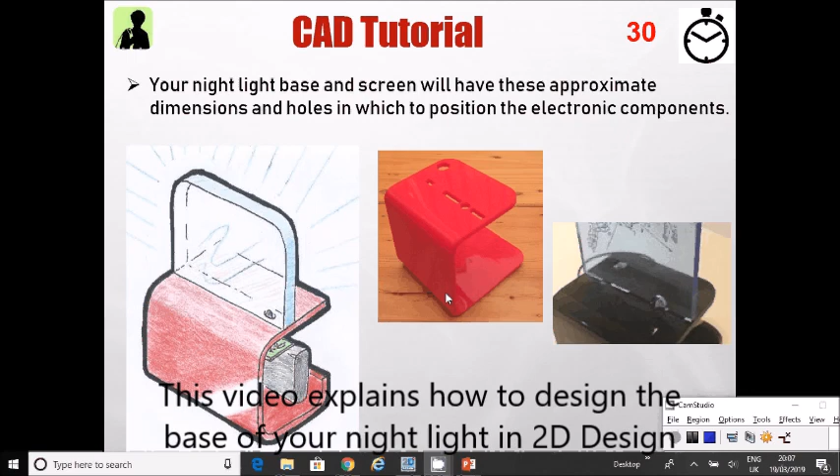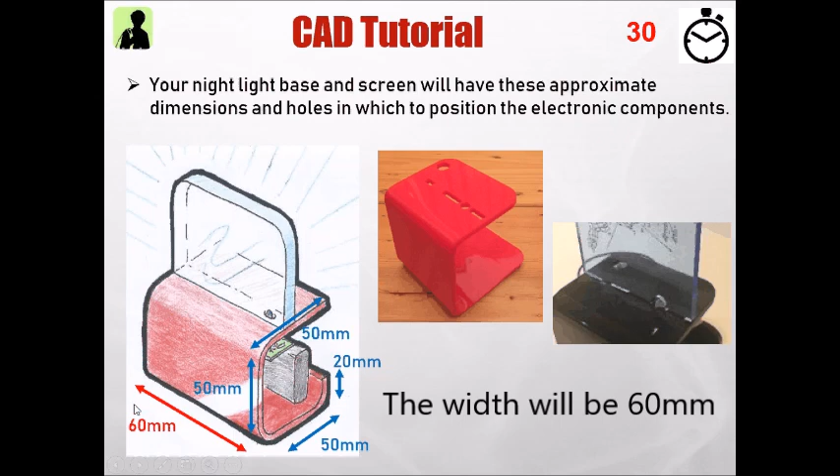Just a few things first. Remember, the size of your nightlight will be approximately like this. You'll have a base of about 50 millimeters, a front 50 millimeters, and a top 50 millimeters. Leaving at least 20 millimeters excess, you're looking at around 170 to 180 millimeters in total. The width will be 60 millimeters, and the top bit will be 50 to 70 millimeters. We also need to design space for the holes where the electronic components poke through and the screen slots in.

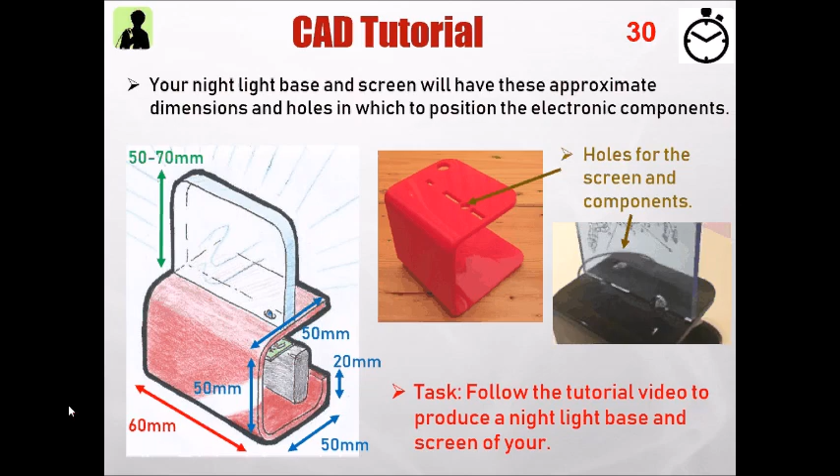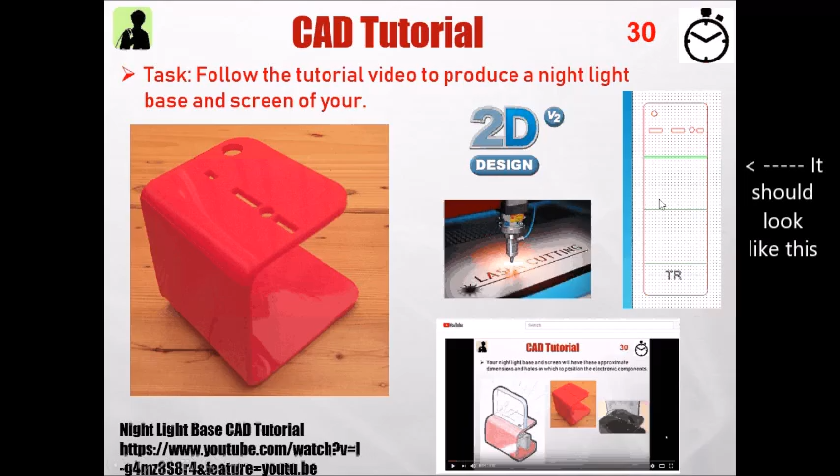So your task is to follow the tutorial, step by step as I do. You'll need to pause every now and again, and you should end up with an image something like this.

Okay, so once you've got 2D design open, it will look like this. First thing I would do is file and save in the location the teacher directs you to. As I said, pause every now and again, and do exactly what I do.

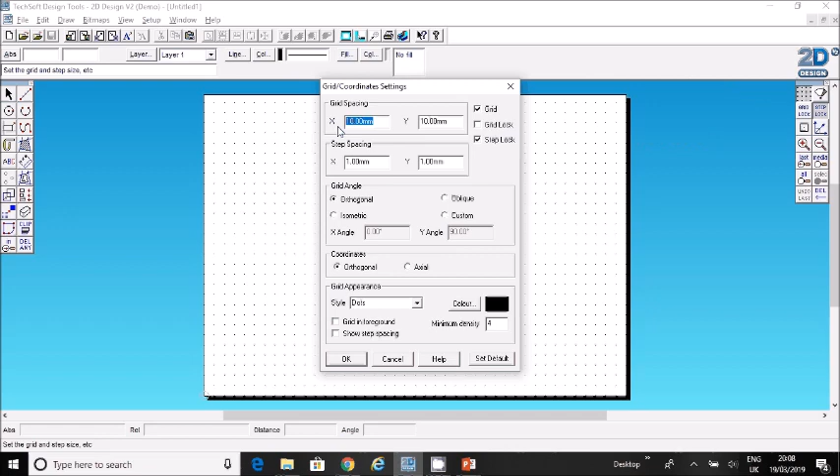The first thing I want you to do is change the grid spacing. Double click on the dots here, and change this to 3 millimeters and 3. Watch the dots - see, they're now closer together. There's a reason for that, and I'll show you later.

Then you're going to use this shaped option. If you click and hold, you get different shaped options, and we're just going to stick with the rectangle for now. If I just click, it will draw anywhere, but I don't want that - I need it to be on the dots, so I'll highlight and delete it.

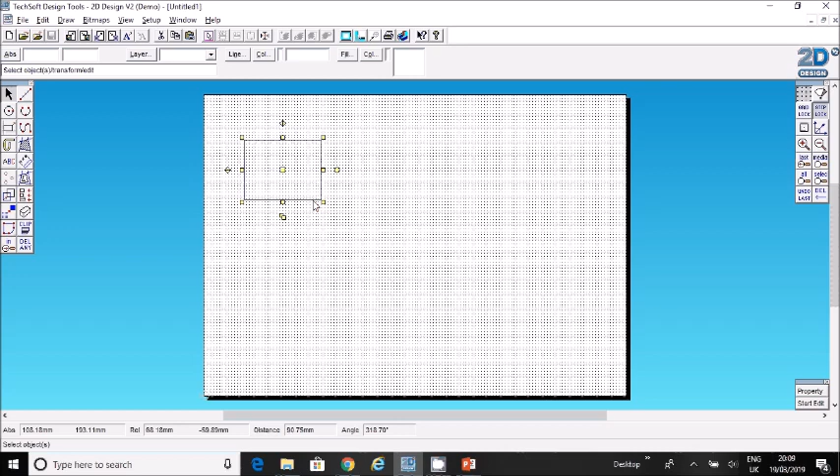Click on rectangle, this time keep grid lock on. Now it will stick to the dots, and that's accurate. I'm just going to delete that.

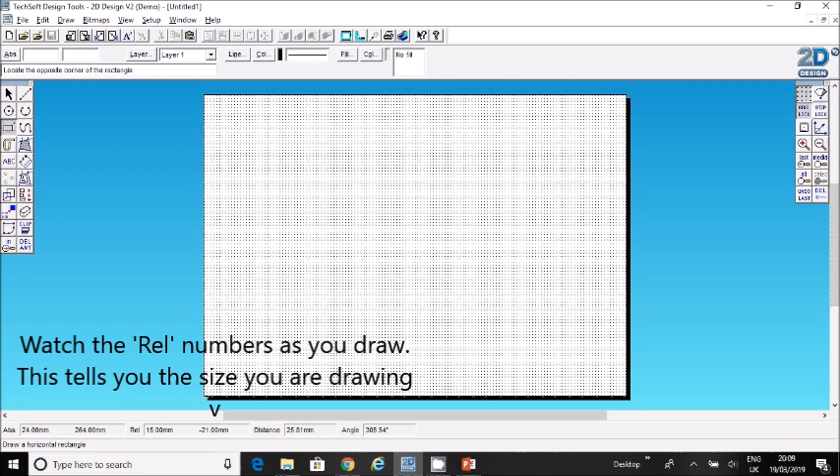You're going to look down here for the rel numbers. As I draw the box, watch for the rel numbers. I'm going to click here and drag it about 60 across, like so. At 60, if you look at the rel numbers at the bottom, and then I'm going to go down 180. Do exactly the same.

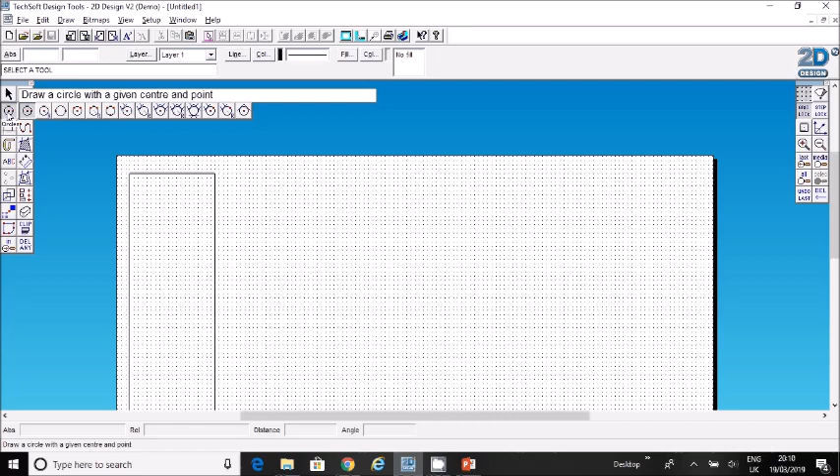I'm going to zoom in a little using this. Right, I want to round the corners. There's this little tool - if I click on line... where is it? Curve? It's this one, draw an arc. That's the second option down.

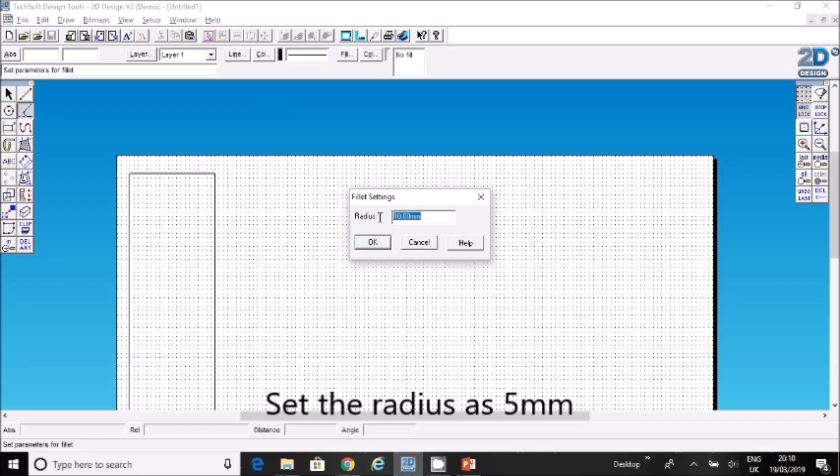I'm going across, clicking and holding to bring up these options. Go across to the end - draw a filleted arc between two lines. Set the radius as 5 millimeters, and then click on two lines, and it rounds the corner. Do that for each corner.

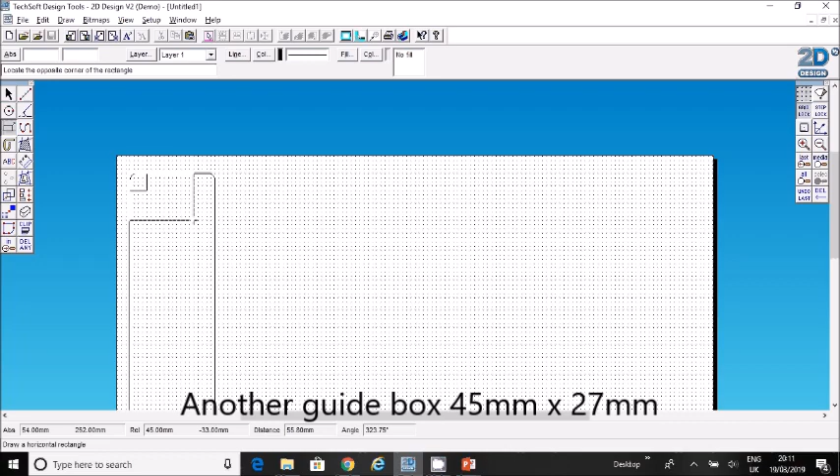Now we need to set the location of the holes for the electronic components. I'm going to use a box just as a guide. Click on this rectangle again, go to the top corner, and look at the rel numbers - one of the components needs to pop out about 12 millimeters by 12 millimeters from the corner. Click there. Then you need another guide box - this time go across 45 and down 27.

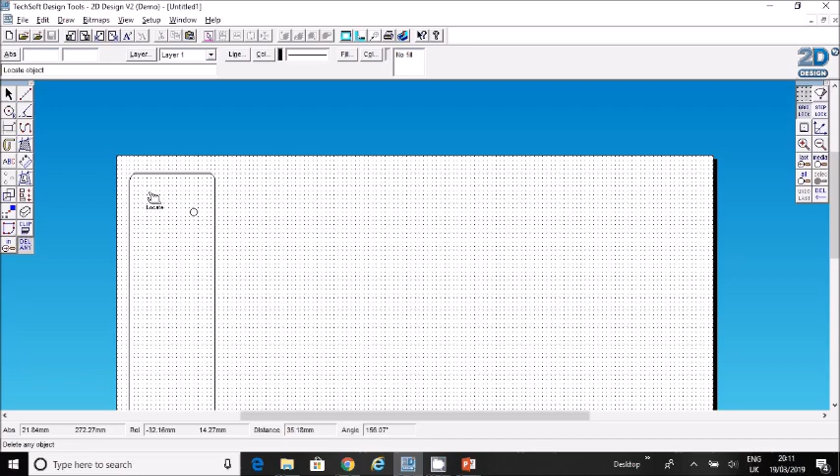Now you need a hole here. Click on circle, choose the second option, and set the radius to 2.5 millimeters. If you click there and there, you've set two circles where needed. At this point, delete the guide boxes - click on delete any. If you accidentally delete the wrong thing, go edit, undo straight away.

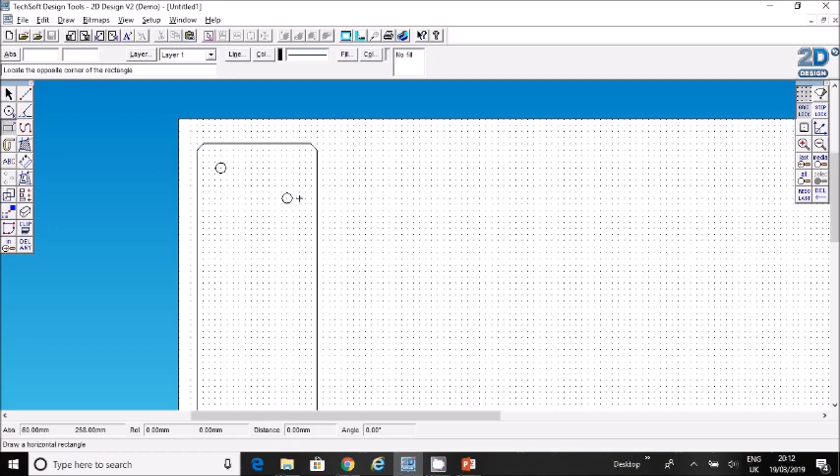The other holes you need are for the screen part, the top part of your nightlight that's going to poke through. Click on the shapes rectangle option, click 3 millimeters from the side of that circle, click and drag - that's 6 millimeters by 3. Then go 3 millimeters on this side, and this time do 12 by 3. Leave another 6 millimeter gap - you can count the dots as you do this. You'd end up with something looking like that.

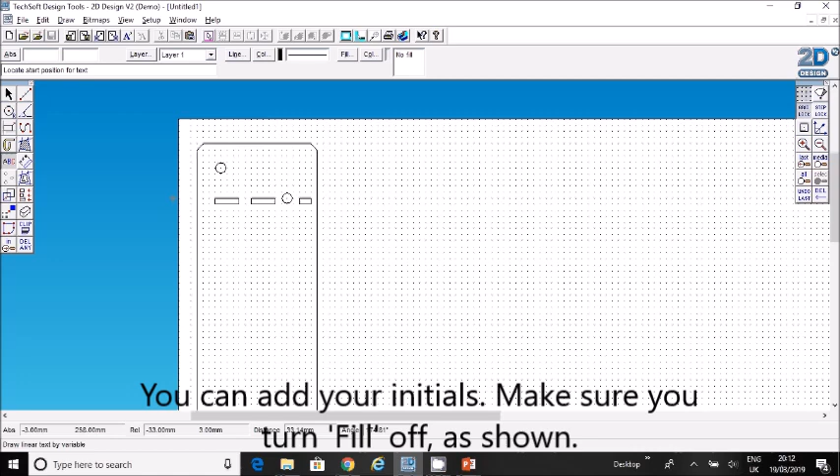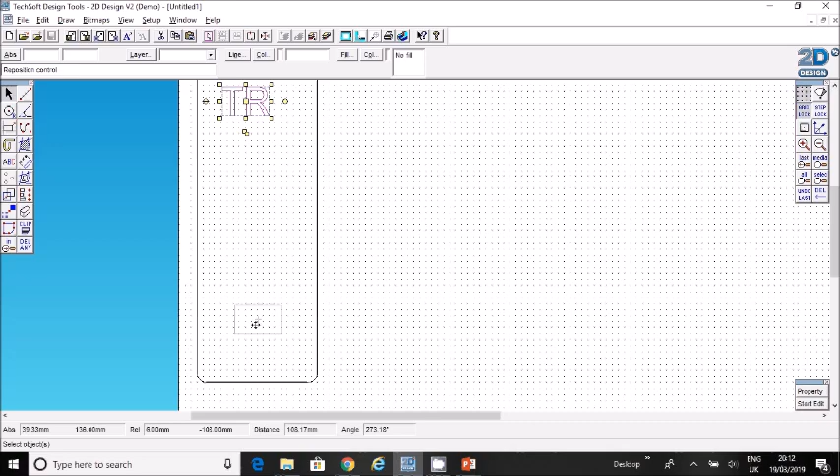Now I would add my initials. Click randomly on this ABC button, then click somewhere and write your initials. At the moment that's solid black - we don't want that, so click on fill here and select no fill. You can reduce the size of your initials if you want, click on the middle yellow dot, and you can change the location. Just leave your initials at the bottom.

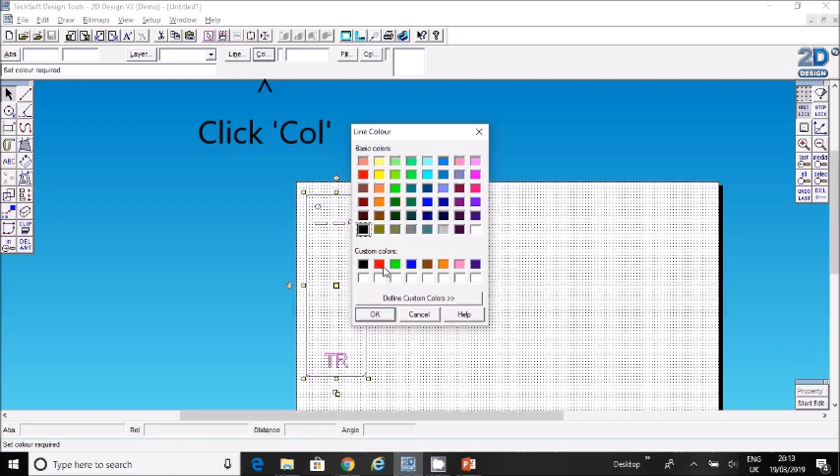The final thing to do before it's ready for laser cutting is change the color. Black will only engrave lightly on the laser cutter, so select everything, click and drag, then change the line color to red. Everything's now red, and we just need to change the writing, the line color, back to black. It didn't work - let's try black again. So it should look like that.

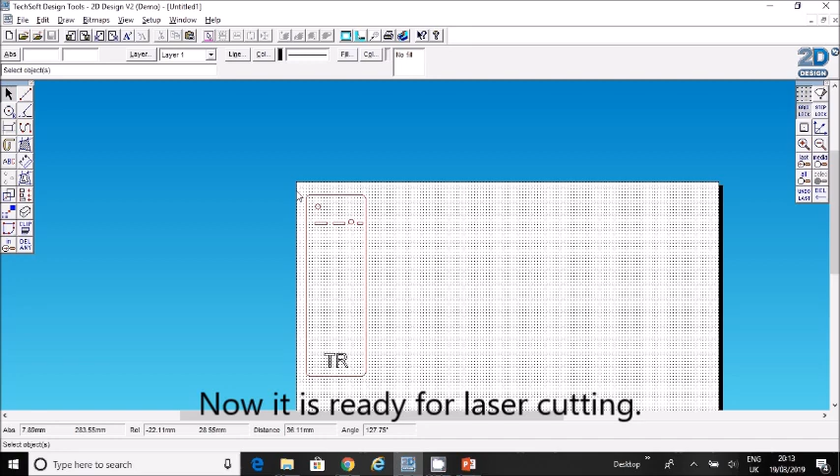Okay, so pause, keep repeating, save regularly, and save where the teacher instructs you. Okay, good luck.